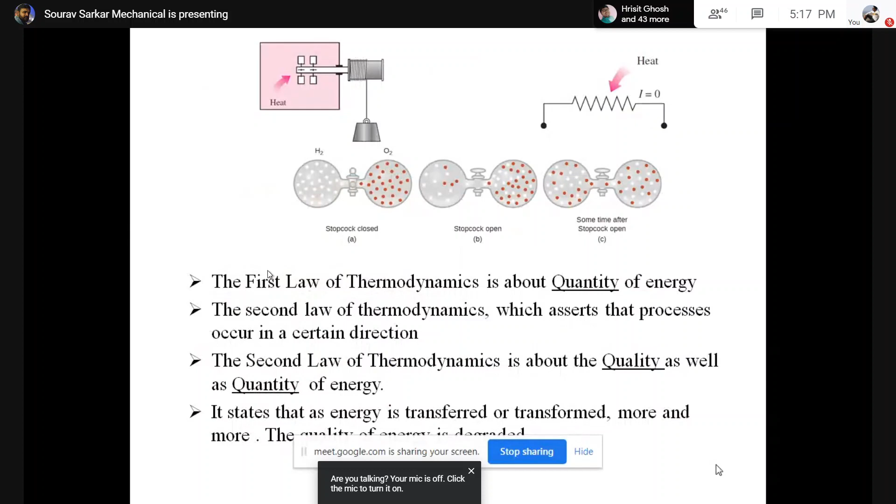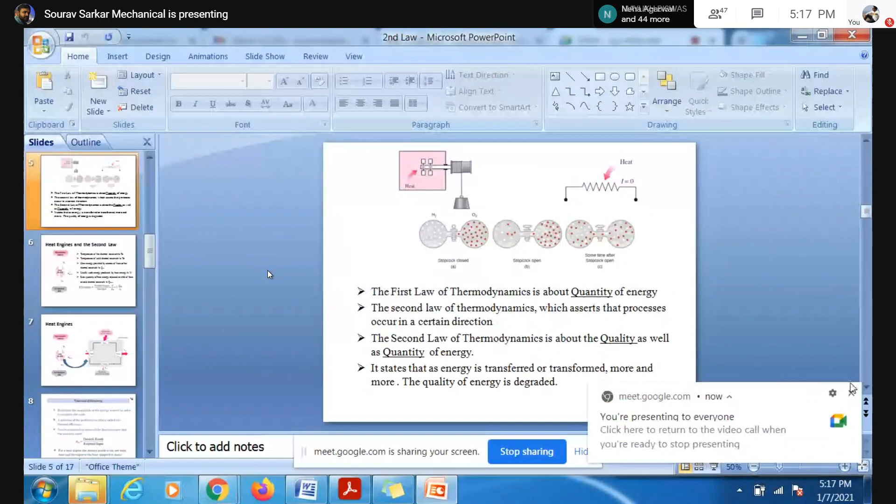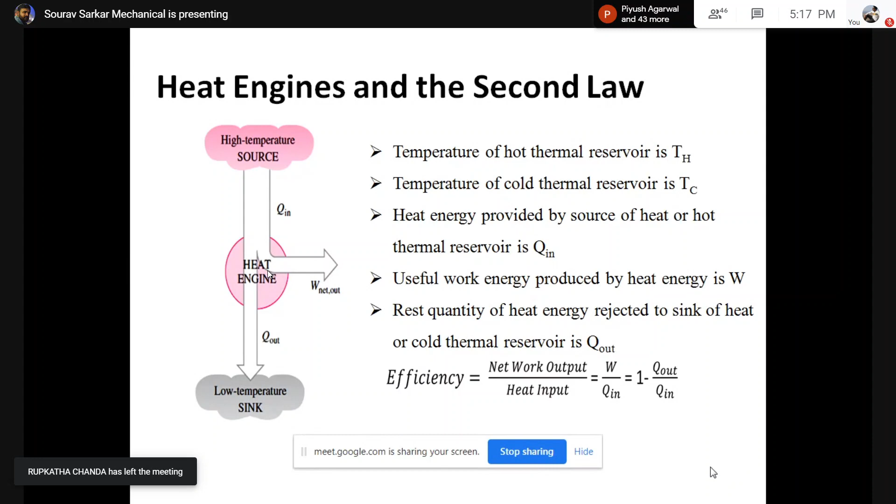So what we were discussing in the last class regarding the second law of thermodynamics, we discussed one statement. That statement is the Kelvin-Planck statement, and it says that it is impossible for any device that operates on a cycle to receive heat from a single temperature reservoir and produce a net amount of work.

So the main point is that if you are supplying heat and a heat engine is converting it into work, some part of the remaining heat needs to be rejected into the environment. That was the main point we discussed, and we defined one parameter, efficiency, and we found that the efficiency cannot become 1.

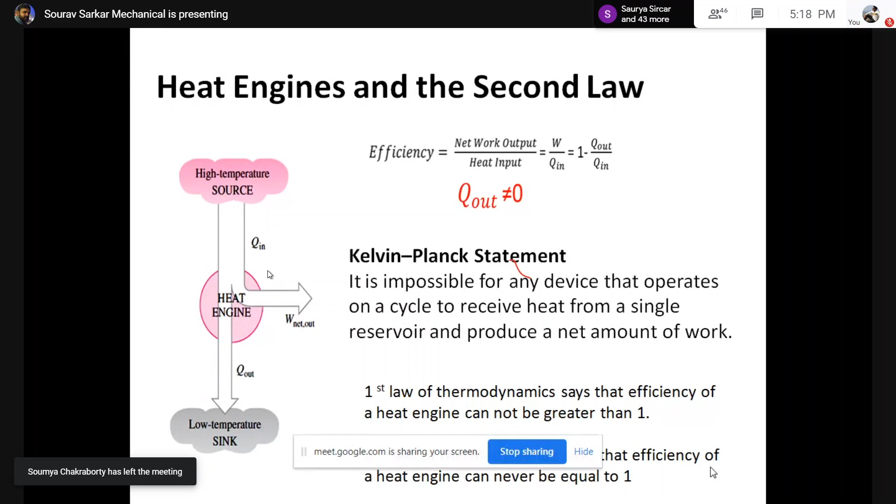It should always be less than 1. We also discussed why we always have a certain value of q out. We understood that q out cannot go to 0, it will always be a positive quantity. So there will always be a situation where you have to reject heat to go back to the initial state. To continue a cycle, every time at the last step you have to reject some heat.

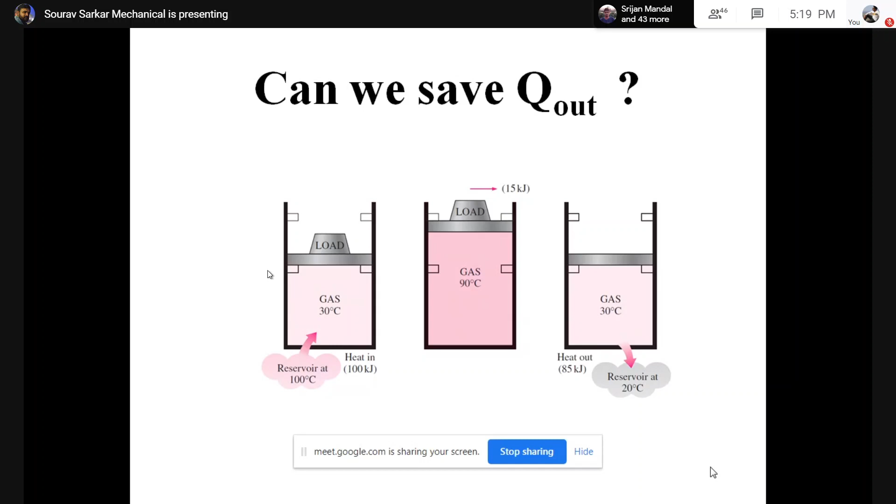That was the statement of Kelvin-Planck. Based on that, we categorized energy into two forms: high grade energy and low grade energy. We know that the conversion of low grade to high grade is difficult because the conversion efficiency is theoretically less than 100%, and it is always difficult to convert heat form of energy into work form of energy.

That is why we need specialized plants or systems that can efficiently convert heat into work. Just think about an IC engine, or maybe your car engine, a diesel engine. Those engines basically convert heat, which is initially in the form of chemical energy, and then the chemical energy is finally converted into heat energy, and finally you get work output at the end of the system.

So basically IC engine and gas turbine.

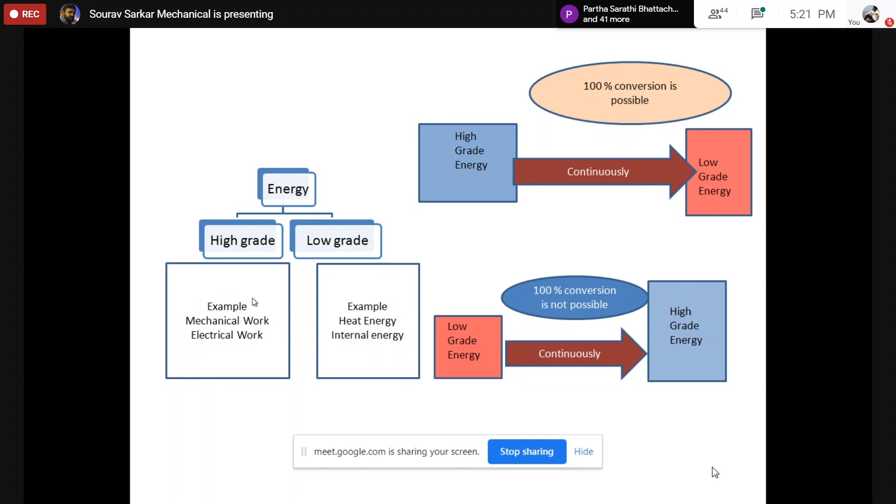So then we discussed what is called a reversible process and an irreversible process. What is a reversible process? A reversible process is defined as a process that can be reversed without leaving any trace on the surroundings.

So what is the meaning of that? Suppose one pendulum is rotating. If it is frictionless, at any point of time if we reverse the motion of the pendulum, it will not create any traces in the environment. So it is very difficult to understand whether the movie is playing in the forward direction or backward direction, because it is a reversible process.

Similarly, in the definition it is said that if you remove the cause of the process, the process will also get reversed. So whenever you think about a process, for every process there will be a gradient — it may be a thermal gradient or a force gradient. That gradient drives the process. So at any point of time, if you reverse the gradient, the process will also move in the reverse direction.

Let me give an example. Suppose, as I already showed you, there is a piston and cylinder, and over that gap you keep a stack of 1 rupee coins. That stack adds some weight on the piston, which is why you experience pressure inside the cylinder. Now if we slowly remove the coins, the pressure gets released, so the gas will expand. At any point, if we add a single coin again, the gas will start to compress.

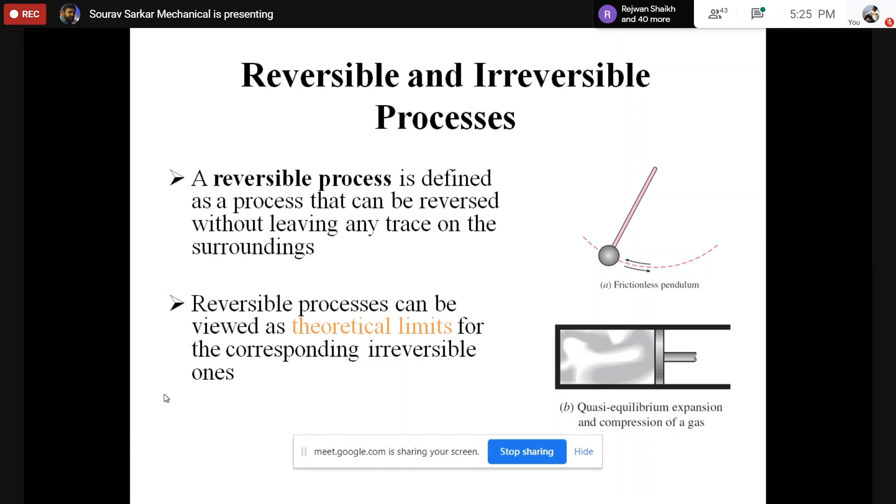So let me finish that. I am talking about conversion of heat into work. For conversion of heat into work, we can consider one cyclic process that can successfully convert heat into work. That cycle is basically called the Carnot cycle. The Carnot cycle consists of 4 processes.

During 1 to 2, it is a heat addition process, the isothermal heat addition. After that, 2 to 3 is an expansion process, the adiabatic expansion, where there is no heat transfer, only work done. Then 3 to 4 is the heat rejection process, the isothermal heat rejection process. Finally, 4 to 1, the last process of the cycle, is the compression process.

So the first process is isothermal heat addition, then adiabatic expansion, then isothermal heat rejection, and finally adiabatic compression. These four processes create one cycle, and we know the area under the PV diagram is the work during the whole cycle. If this work is in the clockwise manner, it is positive work, and if the cycle is anti-clockwise, the work is negative.

But this is the most difficult part. The most difficult part of this whole cycle is this one, isothermal heat addition. That is why it is called an ideal cycle.

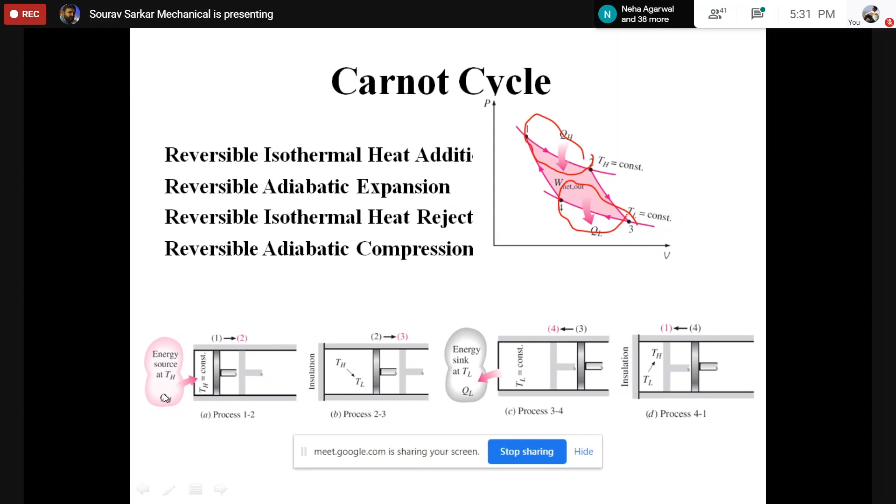So what will happen due to this? If I try to find out what is the heat transfer during this process, why am I doing all this calculation? Because I want to find out what is my efficiency, because I know that the Carnot cycle has the highest efficiency because it is a reversible cycle. So if we see that the heat transfer for the process QH, 1 to 2, is QH equal to Q 1 to 2, and it is an isothermal process.

What do we know from the first law, that delta Q equals what? Delta Q equal to, from the first law for a process, delta Q equals delta U plus delta W. Why is it dU? You know that? U is a property, yeah exactly. Perfect, very good answer. So basically delta Q equals dU plus dW, and it is an isothermal process.

So the temperature will remain constant. If the temperature remains constant, the internal energy will go to 0. So the heat transfer itself becomes equal to the work transfer, since it is an isothermal process. So for work transfer, integration PdV, so if I perform the integration PdV, I will get mR Th ln V2 by V1. This we have already solved in different problems.

Now the next part, this is the heat transfer, you got the heat transfer. Next you have to find out what is the heat rejection. For heat rejection you have the same formula, it is the isothermal compression. So isothermal compression, delta U becomes 0. So finally it will be your work transfer, so it is basically the heat transfer. So you know the heat transfer.

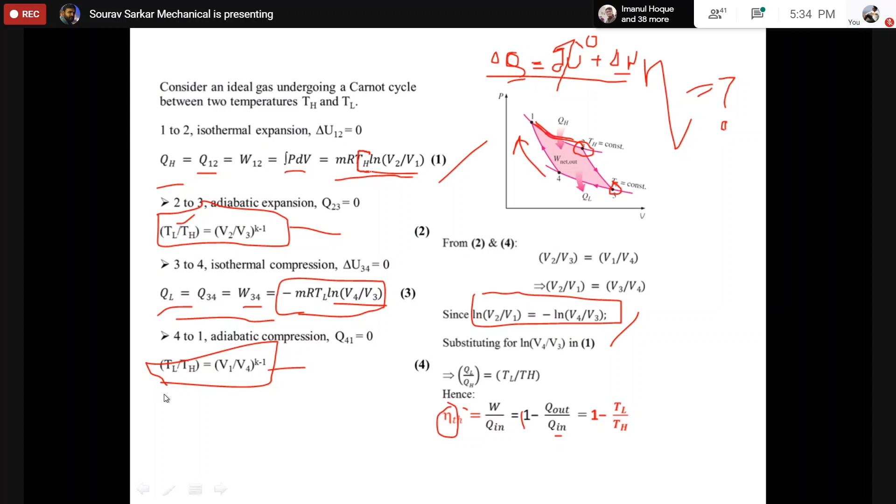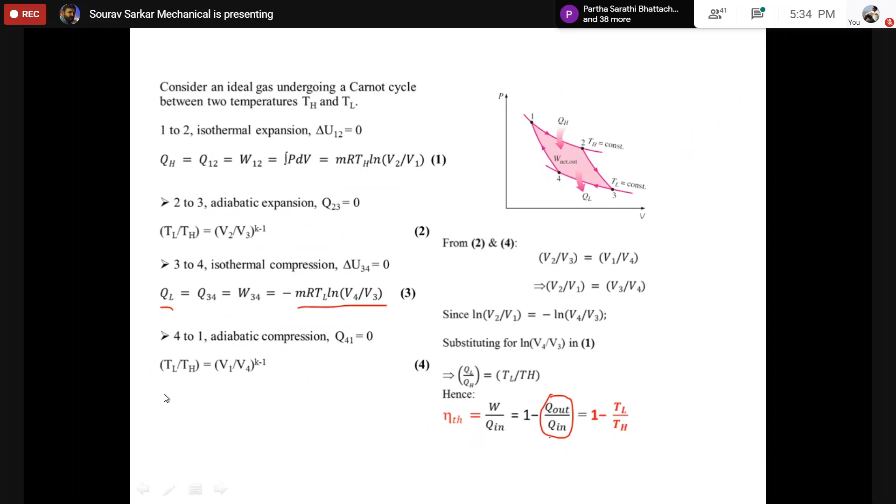If I repeat it, if I try to calculate what is my efficiency, I have to find out what is Q out by Q in. Q out is nothing but my QL, where you have mRTL ln V4 by V3, and Q in is basically mRTH ln V2 by V1. Using equations 2 and 4, you can easily find out that this V2 by V1 and V3 by V4 are the same ratio. So from that I can cancel this ln V2 by V1 divided by ln V2 by V1, so finally the TH and TL will remain.

So this will be your efficiency, this is the maximum efficiency that one can achieve if you are operating between TL and TH. If this is TH, the high temperature, and this one is TL, the low temperature, the maximum efficiency operating between these two temperature ranges will be 1 minus TL by TH.

So what is the physical meaning of this? The physical meaning is that as you increase TH, what is TH? TH is basically the temperature of the source. So if we increase the temperature of the source, this fraction will become small.

TL by TH will become small, so it will reach to 100%. So if this TL by TH is increasing, what will happen? That TL is basically the low temperature. So if your sink temperature decreases, or if your source temperature increases, the efficiency increases.

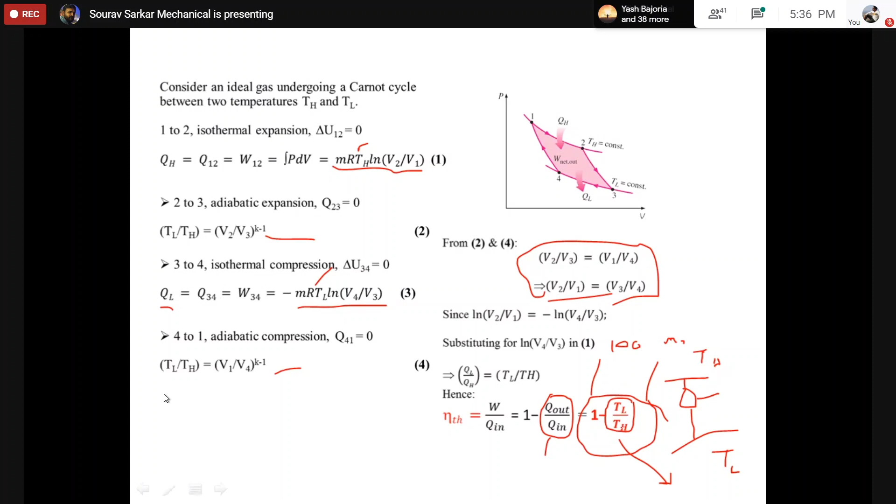So suppose, just consider one example. I'll try to define this as quality of energy. What do you mean by quality of energy? What I'm trying to say is if I have one temperature source, means my heat source temperature. What is heat source temperature? Suppose if you have coal, so if you are burning that coal, that burning will create a high temperature environment, and you are trying to use this high temperature environment for running your heat engine.

So if my high temperature environment or heat source temperature is high and the ambient temperature is constant, suppose it is 303 Kelvin, like 273 plus 30 degrees Celsius. So if environment is at 30 degrees Celsius, and where you are burning that coal, that will have a temperature of 925 Kelvin, maximum around 650 degrees Celsius, so around 600 degrees Celsius.

So if it is something like that, in that case you will get an efficiency of 67%. So maximum you can get 67%. But if we reduce the temperature, if I use the same mathematical relation, what is the mathematical relation? That is 1 minus TL by TH, into 100.

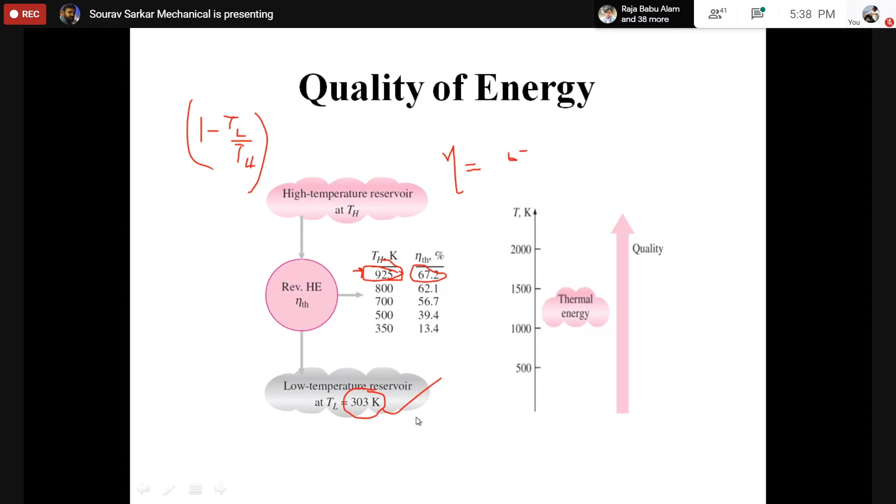So if I use this mathematical relation and simply put the value of TL equal to 303 and TH equal to simultaneously 925, 800, 700, like this, you will see that the efficiency will drastically drop.

So what is the importance of this? The importance is, suppose you are trying to convert heat into work. At that point of time, you are not bothered about quantity of energy.

Like suppose I have one heat source which is very big, and that heat source temperature is 40 degrees Celsius. And I have another heat source which is very small, but that is having a temperature of 800 Kelvin. So if we try to extract energy from the 800 degree object, my efficiency of the heat engine will increase. So quantity of energy matters, if you have a high quantity, you can convert into more amount of work. But the conversion process efficiency will depend upon what is the source temperature and what is the sink temperature. If your source temperature increases, always your efficiency increases.

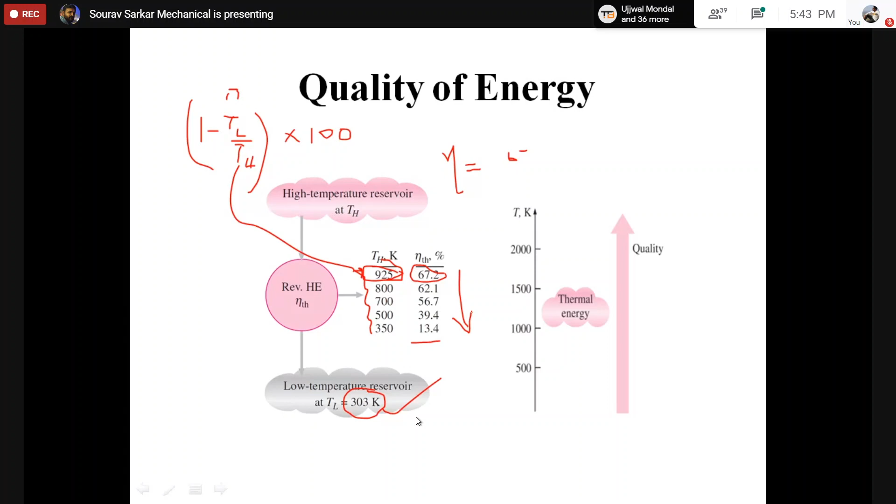You are not worried about how much you can convert, you are more worried about how efficiently you can convert. That is the fundamental of quality of energy. So this is the main thing I'm trying to say.

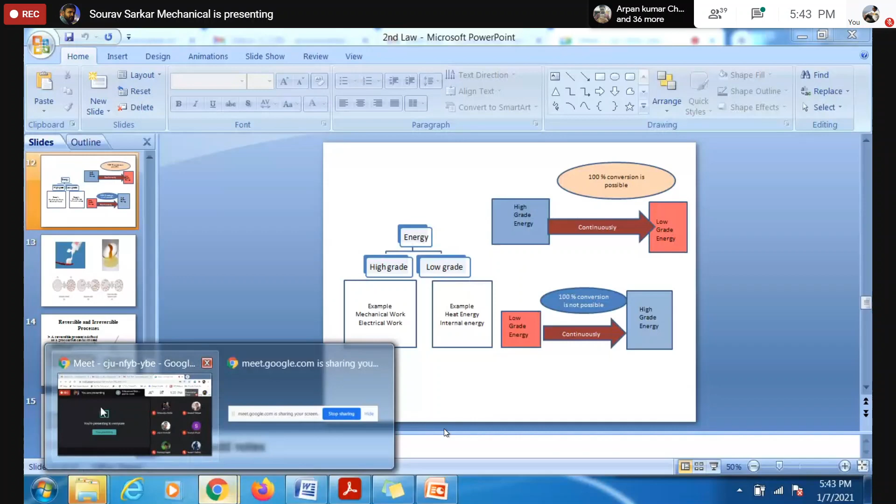Just before going further, I have one question. Suppose if you leave the door of your fridge open, what is your expectation? Will the room temperature increase or decrease?

Increase. Yes sir, is it so? Why?

I think the refrigerator actually absorbs the heat from the substance and rejects the heat to the surroundings, to cool that substance. That's why the heat which is rejected to the surroundings will increase the temperature of the room. Very good, Swarnodeep.

So basically the refrigerator is something that absorbs heat from some low temperature source and consumes some work from some external source, and finally rejects this heat into the environment.

So if we keep your fridge door open, what will happen? It will absorb the heat from the nearest points, but finally after consuming the power, the backside of the fridge will reject the heat in the room itself.

So finally every time you are consuming some electricity, and that electricity is finally converting into excess heat. So basically if I try to summarize the heat equation, every time you are absorbing QC, and along with this QC, you are absorbing some kind of electrical power.

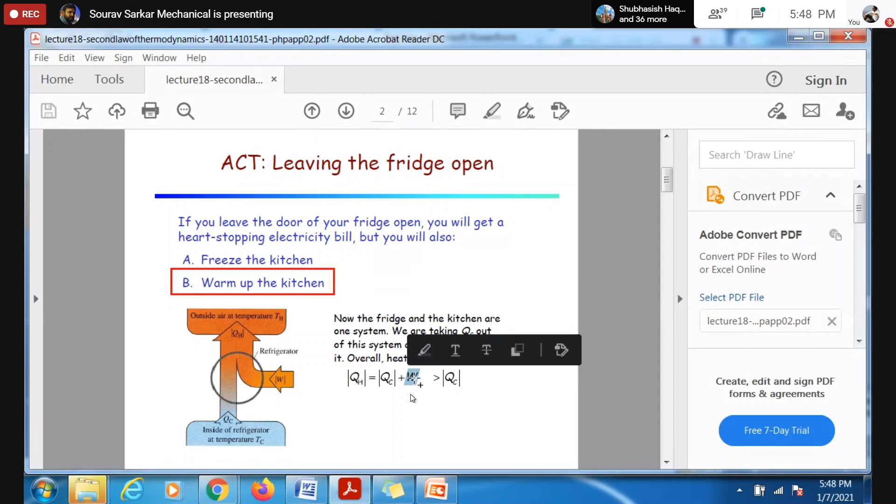Because transfer of heat from low temperature to high temperature is not a spontaneous thing. We know that heat always transfers from high temperature to low temperature. So if you are transferring heat from low temperature to high temperature, there must be a work input. Without effort, you can't get a transfer of heat from low temperature to high temperature. That is the statement of Clausius.

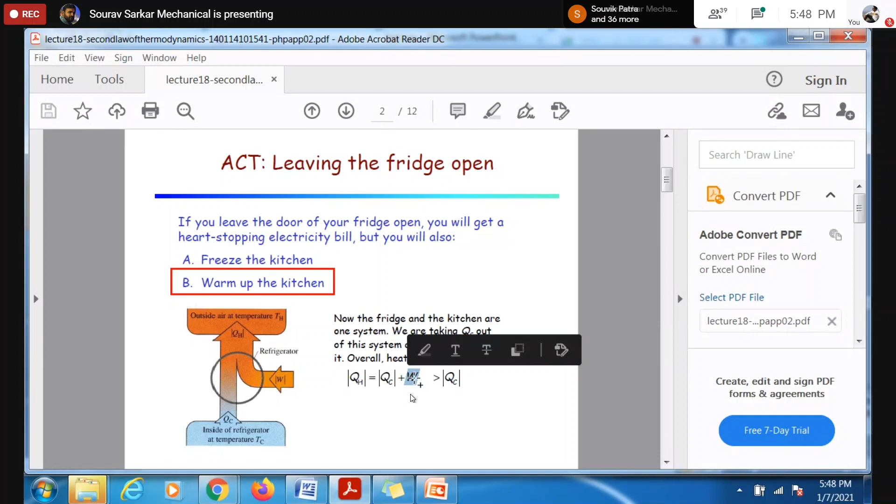So I talked about two statements. If I try to summarize the first law and second law: it is impossible for any system to undergo a process in which it absorbs heat from a reservoir at a single temperature and converts the heat completely into mechanical work, with the system ending in the same state as it began. That is, it is impossible to build a 100% efficient heat engine.

Similarly, for refrigeration, it is impossible for any process to have its sole result be the transfer of heat from a cooler body to a hotter body. What is the basic meaning of this statement? If I try to simplify it: it is impossible to build a workless refrigerator.

If you read a WhatsApp forward where someone has written that they have developed a refrigerator which will cost zero electricity, that statement is wrong, because it is impossible to construct a device that will transfer heat from a low temperature body to a high temperature body without consuming any work. It should consume work. You have to pay for that.

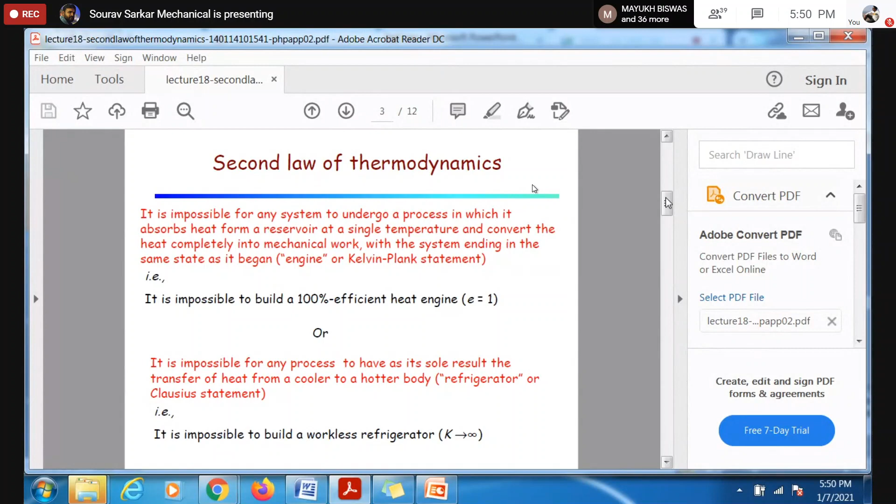Is that right? So this is the second law of thermodynamics, with two statements. One statement is for the heat engine and the other is for the refrigerator. Now these two statements are equivalent. This is a standard question in the semester: can you prove that the Clausius statement and the Kelvin-Planck statement are almost the same thing?

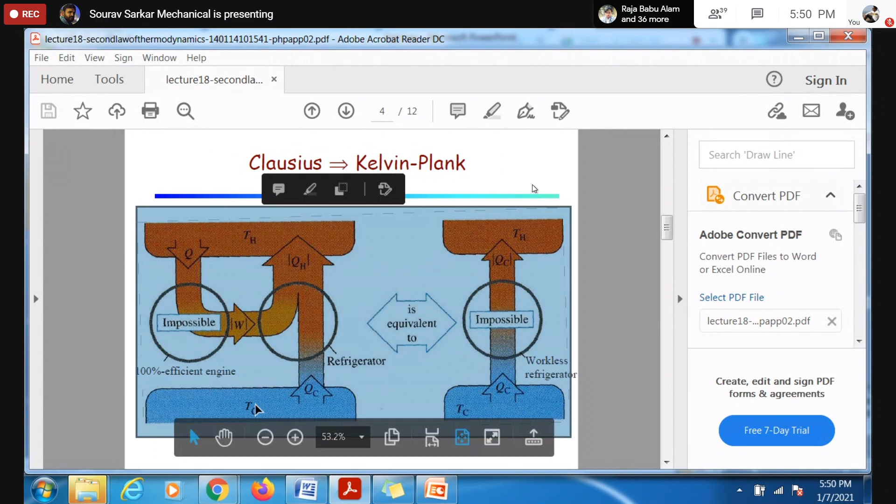It can be easily proved. Suppose I have one high temperature source and one low temperature sink, and I consider a heat engine that is violating the Kelvin-Planck statement. How is it violating? Because whatever it absorbs is completely converted into work - there is no heat rejection part, only conversion of heat to work. So it is violating, it is a 100% efficient engine, which is impossible. So I will assume my heat engine violates the Kelvin-Planck statement.

Now what I'm doing is feeding this work into a refrigerator, and that refrigerator is absorbing heat from the low temperature, consuming some amount of work, and finally rejecting that heat to the high temperature source. So this one is violating, this one is not violating.

Let's see, is it violating? If I combine these two, what is happening? It is absorbing heat from there and rejecting this much heat. So what is the net heat transfer with TH? That is basically QH minus Q, which is nothing but QC.

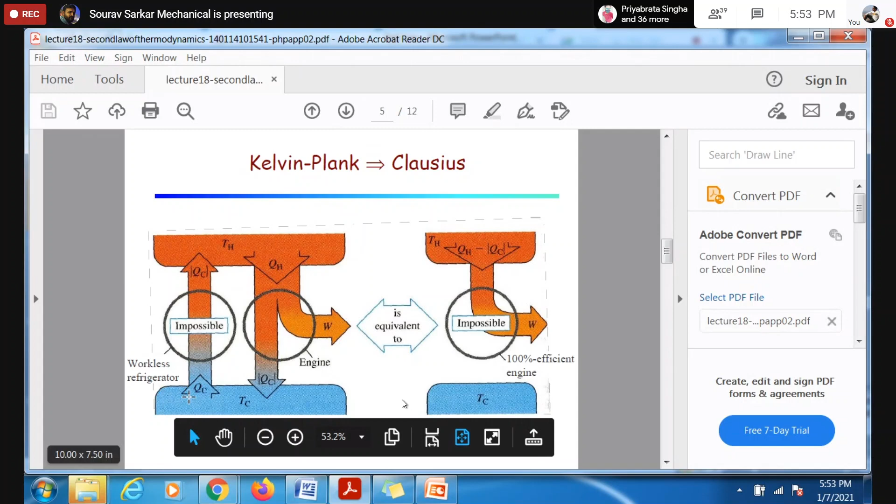Similarly, I will show you another example. Suppose this is one refrigerator and that refrigerator is violating the Clausius statement - it is absorbing heat without any work, transferring heat from low temperature to high temperature. And another heat engine is absorbing heat, rejecting work, and rejecting some amount of QC.

Again, if we combine these two, what I can see is that the net transfer to the high temperature source is QH minus QC, and the net transfer to the cold temperature, QC, is finally zero. So this leads to me developing one heat engine that is absorbing QH minus QC and converting the whole amount of heat into work, which is violating the Kelvin-Planck statement.

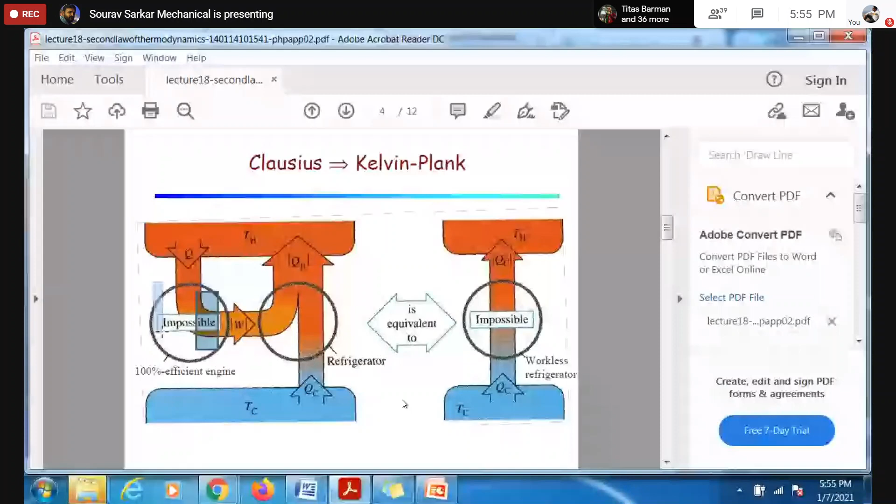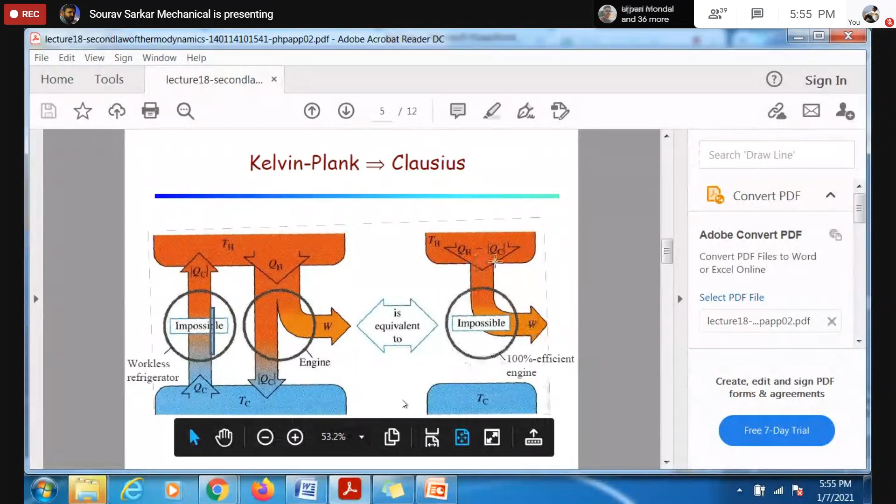So the same way, I assume that my refrigerator is violating the Clausius statement, and that leads to - I have proved that it is impossible. If I violate the Kelvin-Planck statement, that will lead to violation of the Clausius statement. If I violate the Clausius statement, that will lead to violation of the Kelvin-Planck statement. This is one of the standard questions in the examination.

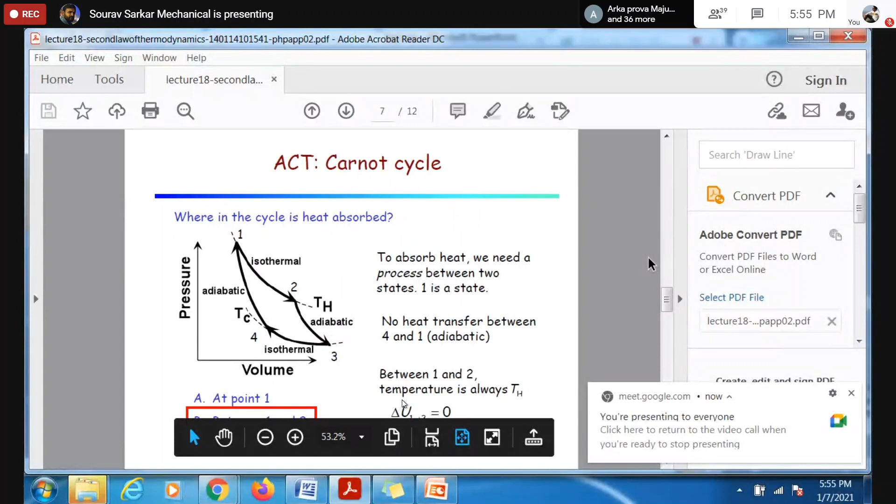Okay, so now what I was saying is that this is the Carnot cycle, and we have defined the efficiency of the Carnot cycle. For a heat engine, if I try to define the efficiency, it is basically work output divided by heat input.

For refrigerator, we have defined one parameter. That parameter is basically called the coefficient of performance, COP, and the COP is defined as K, or maybe it is written as COP. What is that? It is the heat absorbed at the low temperature end divided by the work input. Why is it so?

Think about it: for a heat engine, what is your desired output? Your desired output was the work output, and how much are you paying for that - that is basically your QH. So this is your desired outcome and this much you are paying. If we think about a refrigerator, what is its desired output? To get the cooling effect. So your cooling effect is your desired output, and for that how much are you paying? You are paying W.

Similarly, another parameter is basically called the coefficient of performance or COP. That parameter is defined by this equation. And you can also prove that the reverse Carnot cycle will have the highest COP.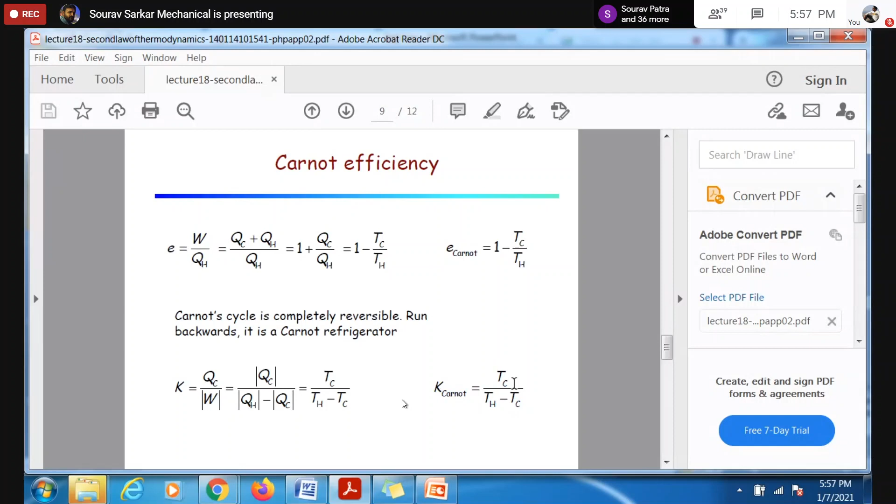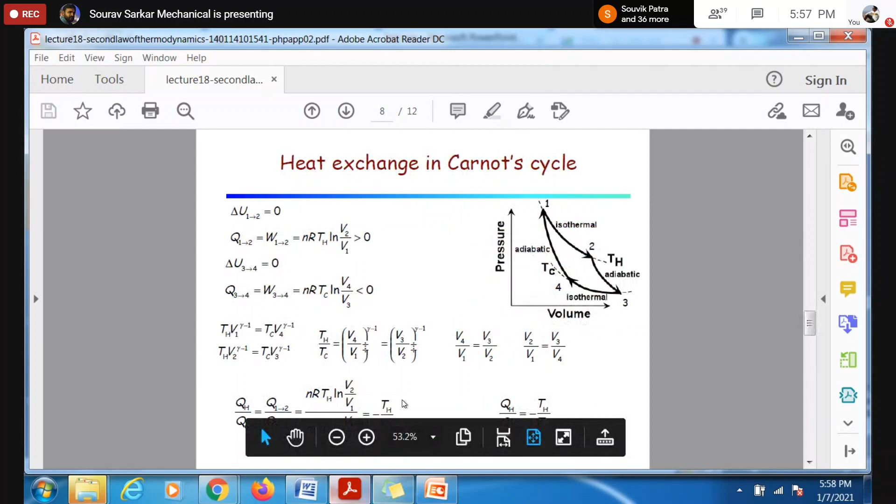So these are the remaining parts of the second law. Hopefully the second law discussion ends here. If you have any doubt, I can clarify those.

Any doubt up to this much? Any doubt? Am I audible still? Yes sir, you're audible. Okay, so if you have any doubt, you can ask.

Or even you can start to read. After that, when you start to solve the problems, then you can also ask the doubts.

Sir, the question was regarding a pot in which food is cooked and then a lid is placed on top. The inside of the pot then cools down to have a pressure lower than atmospheric pressure, and the pot is lifted while holding the lid, with the whole pot lifted along with the lid. So for simplicity, if we assume the inside of the pot is a vacuum with outside air pressure, my question is: what is the force, the interaction between the lid and the pot itself, which makes the lid stick to the pot?